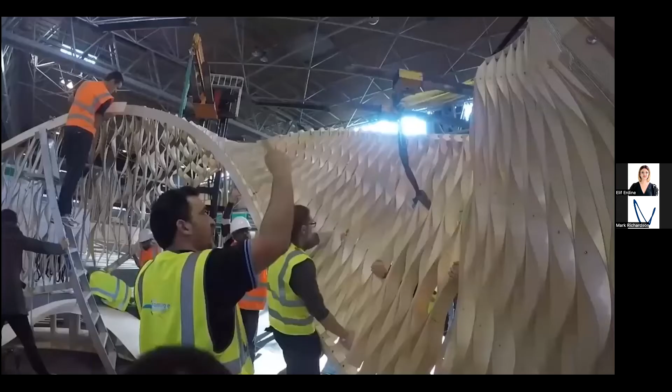For all of these systems, we work with various design methodologies, which can be computational-based, simulation-based, or even software applications. Just to give a brief overview of the research on spatial structures undertaken in EmTech over the past 20 years, this video shows very quickly what we have been developing, experimenting with novel design processes, computational methodologies, and building systems.

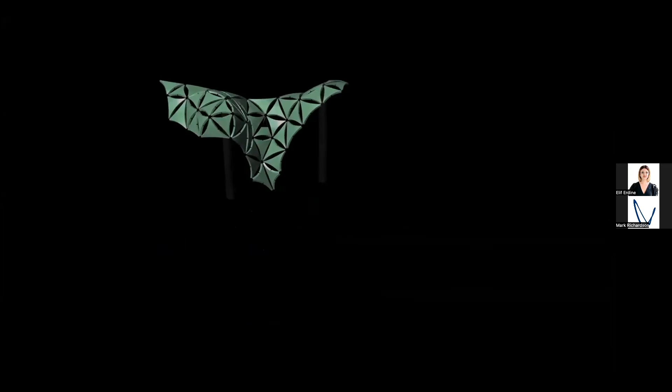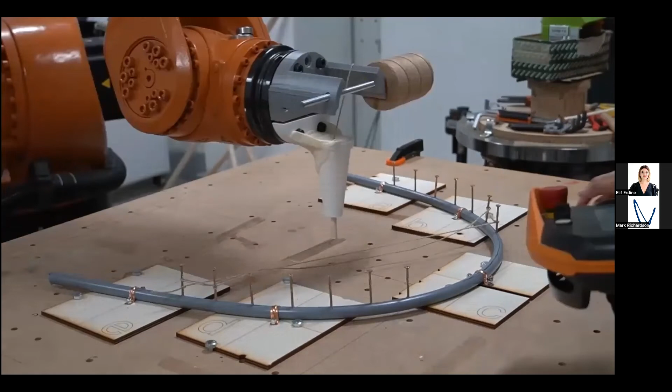I want to stress that all of our computational experiments are really calibrated from physical experimentation. We first look into material behavior on a component or regional scale, and then we're interested in quantifying these material behaviors to develop more complex computational systems.

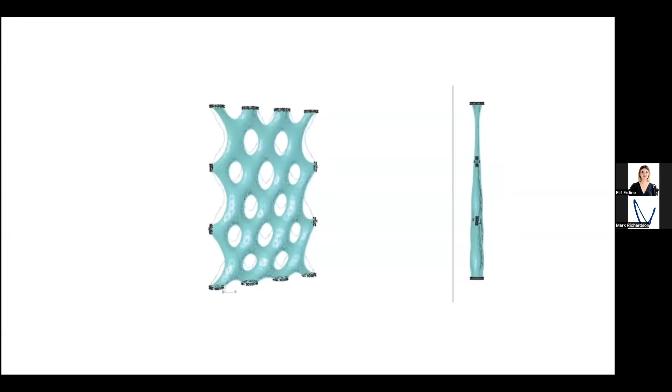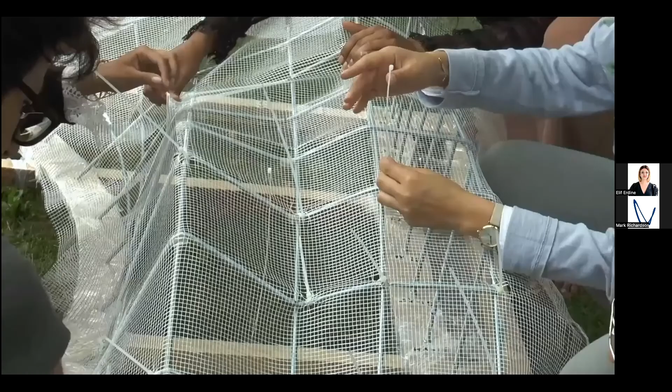We believe it is impossible to build your knowledge from only one project, so we try not to use more than one technique or methodology in one project. We like to approach research as a craft tradition, an atelier tradition. Rather than developing one big tool, we believe it's more intelligent to design smaller tools tailored for every individual project.

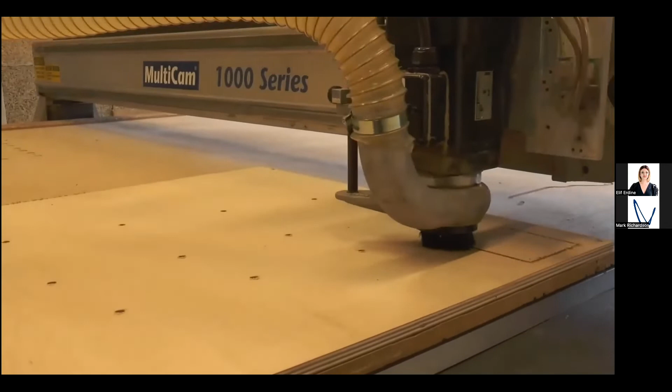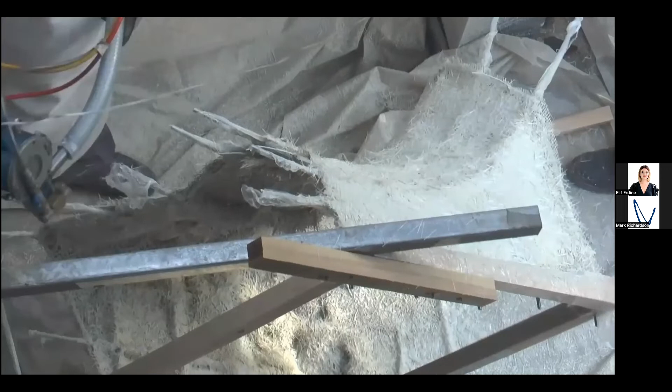You're seeing also some of the workshops that we have been conducting throughout the world, in Istanbul and London, as well as the research that we're undertaking in EmTech.

Our approach is very much inspired by nature, and I'm sure you've heard the phrase 'form follows function.' But what we're really talking about is not imitating the forms of nature, which has been done a lot in the past. We're really talking about designing using the processes of nature—that's the evolutionary process I'd like to talk about today.

Understanding evolutionary processes and principles: if we approach biological principles, biology, design, and computation as three different fields, we believe we can create a bridge between evolutionary principles and design through computational processes. This bridge can create a feedback loop where design and computation influence one another.

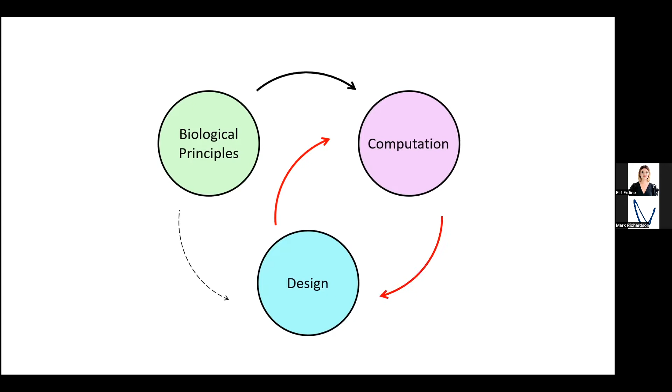As we might all be aware, architecture has a multifaceted nature across different scales, and the majority of problems we deal with in architecture involve multiple different objectives. That's why evolutionary computation, and in general learning from nature, is very relevant—nature teaches us about complex systems that emerge from the local interaction of parts.

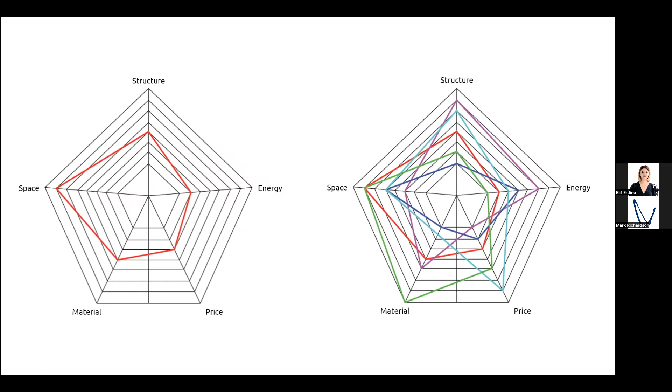This understanding, this way of approaching architecture as a field dealing with multiple conflicting objectives, really necessitates us to question the architect's role. When, as architects, we use these methods—learning from nature, understanding evolutionary principles—as a method of solving a problem, our role essentially changes from coming up with a single solution to coming up with a series of questions and architectural problems.

That's how we approach our design problems across various scales in EmTech. For us, it's really about designing the architectural question or the problematic, not coming up with a singular solution. So if we set this approach on one side, I want to give you a brief summary before I jump into the project.

I want to summarize the kinds of constructions, spatial structures that we've been building in EmTech for the past two decades. The emphasis for today will be timber structures. At the AA, in EmTech in particular, we're interested in the culture of making.

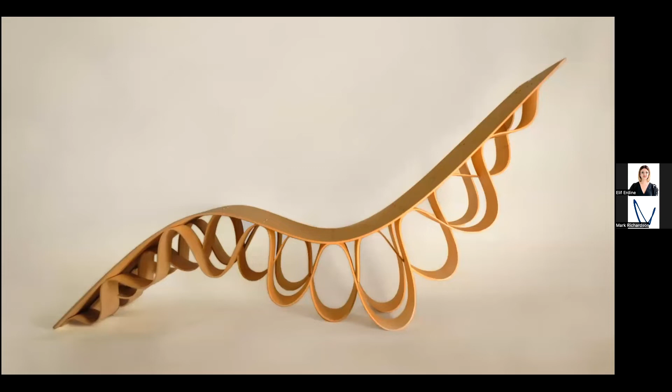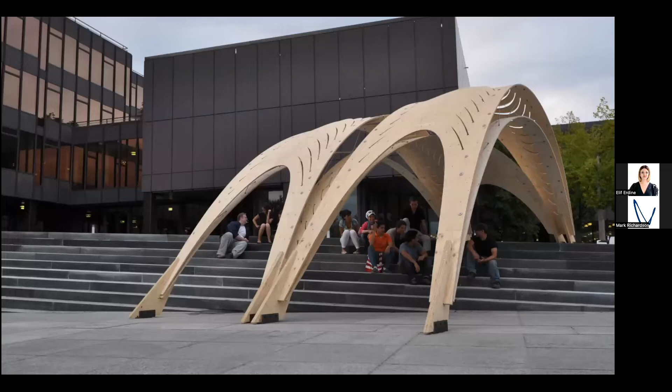We really enjoy making, and we collaborate with engineers as well—we really believe in learning by doing. Over the past two decades, we've built several structures made with timber with different functionalities, created with lightweight timber panels or sheets. Through different techniques, such as different types of formwork or ways of inducing curvature in different directions, we have designed these self-standing structures. In most of these, we collaborated with Buro Happold Engineering; this one was a collaboration with ETH.

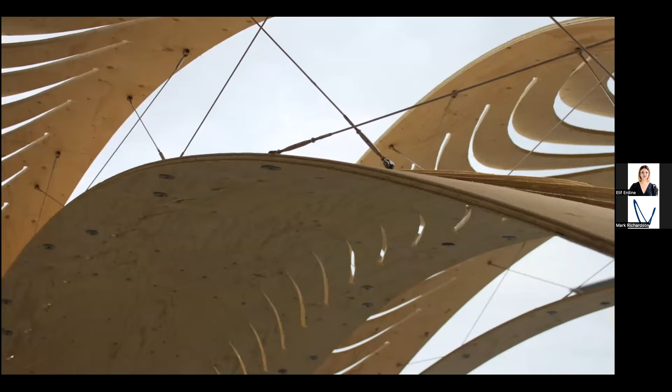Another example is a study based on creating a doubly curved self-standing structure, based on the different material behavior of timber in different directions. Some examples of that—this was a collaboration with Arup.

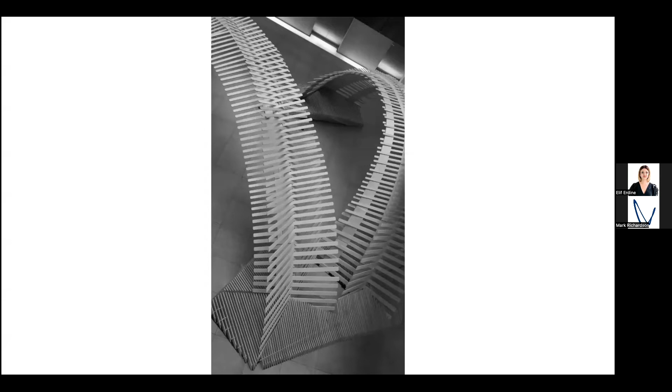As I said earlier, in each of these structures we've been exploring a specific technique geared towards inducing curvature, or joinery, or a combination of both. These projects are very much student-led—they begin with tabletop models, as you see here.

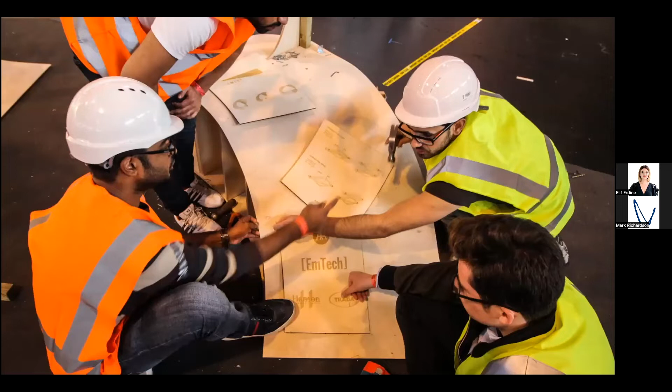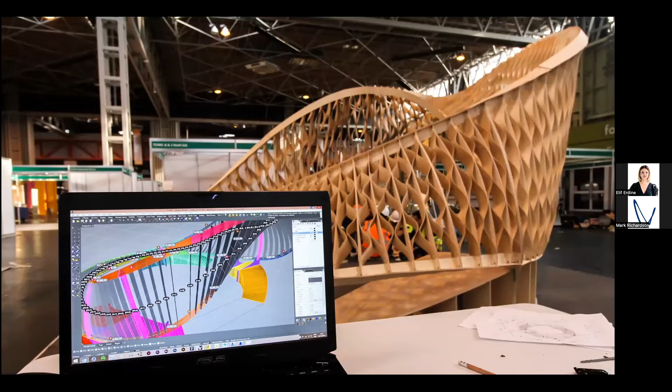So the structure I'd like to discuss today was a collaboration between EmTech and Hassell Studio. For those who might not be aware, Hassell Studio is a very large architectural office based in Australia, with offices also in London, New York, and Shanghai. We were approached by Hassell for this collaboration. This pavilion, the Remerge Pavilion, we built last year, almost exactly a year ago. It was open to the public on Bedford Square for a month. Our structural consultants were Buro Happold Engineering, and our life cycle assessment consultants were One Click LCA.

This is Bedford Square, where the AA is located. In terms of timing it was quite nice, because this was right after we moved back to our studios—after lockdown we were online for a year or so. So when Hassell approached us, it was right around the time we were back at the AA. It was a really nice way to come back to our buildings and restart that making culture again.

So I will first describe the design principles for the pavilion. Hassell Studio asked us to keep the carbon footprint of the project to an absolute minimum, and so they asked us to use only reclaimed wood for this pavilion. Of course, using reclaimed wood panels or planks requires the system to be modular.

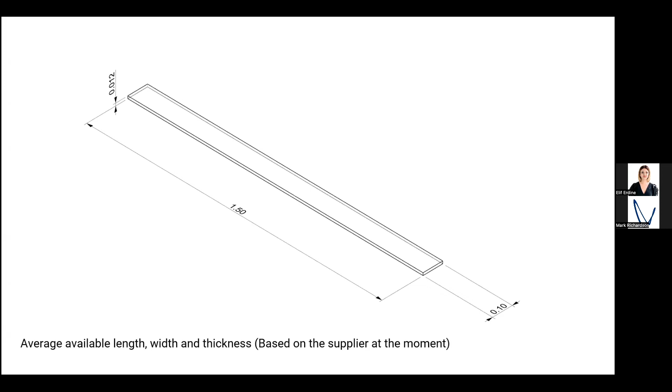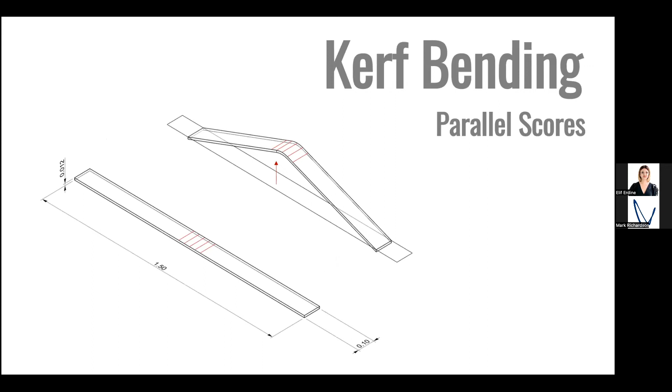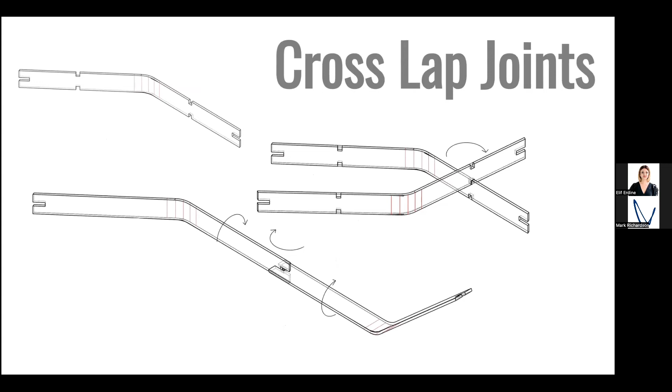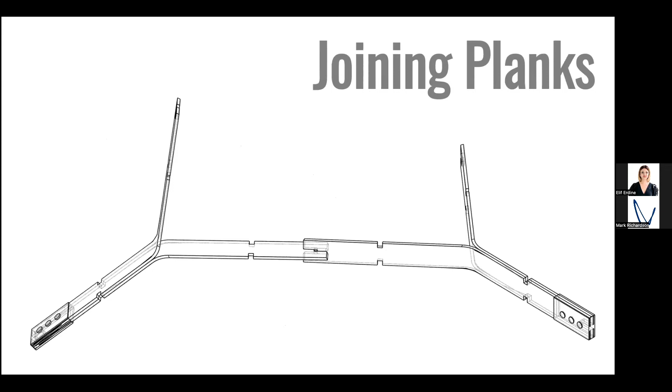So we started thinking about how we could create as lightweight a structure as possible with timber planks. Initially we thought about kerf bending, introducing scores into the timber planks—these can be parallel or radial scores. We were also careful about the joinery system; we wanted to minimize secondary materials in the joinery system. That's why we started exploring cross lap joints and how we could join these planks to create a regional scale aggregation.

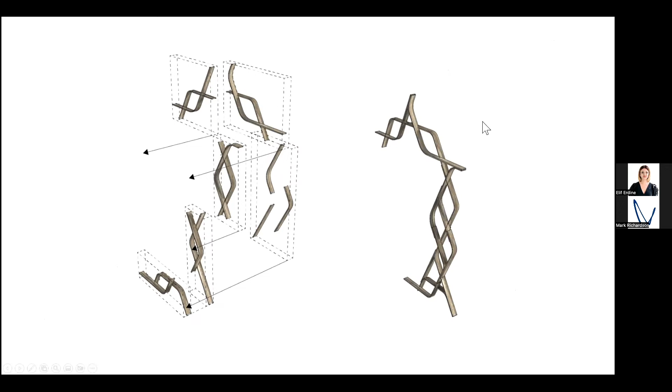This shows the system principles. We have these timber planks, which are scored and also steam bent—a combination of two techniques, creating 100-degree angles within one plank, then joining these planks to create this rib system. This rib system is then rotated and aggregated to create a self-standing structure.

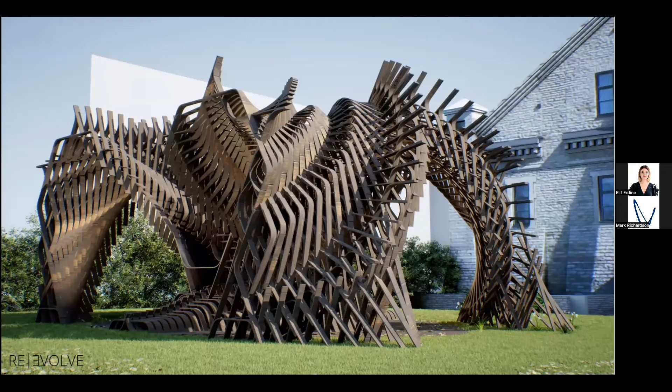So this was the initial conceptual design idea that we had. This design we also submitted for the Tallinn Architecture Biennale last year, and we were a finalist in that competition at the same time as we were developing the pavilion itself.

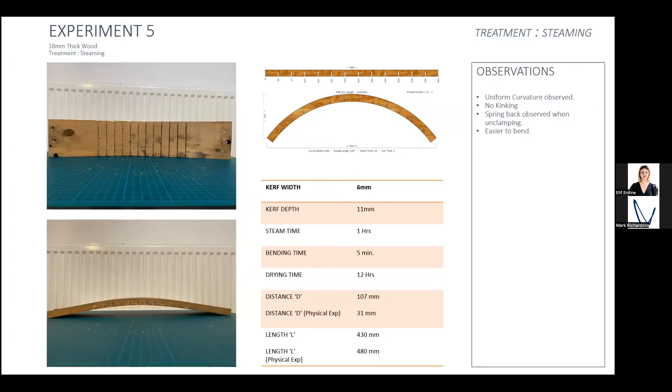During the scoring process, our students did a lot of physical experiments with the material we found—how much it can be bent, how much distance between each score, how deep the scores should be so the material doesn't break, as well as recording the production time of each experiment to estimate how long the final production phase would take, and of course recording the springback values. It was quite an iterative process, during the summer of 2021, and of course documenting and recording all of these experiments.

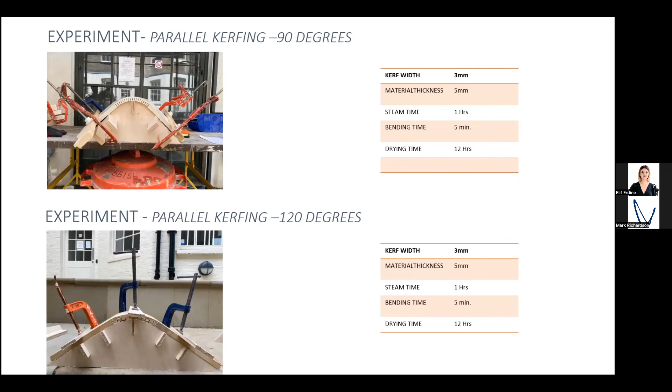As I mentioned earlier, using life cycle assessment was quite important in this phase. Using LCA as a design driver in the computational workflow basically allowed us to consider not only the material itself, but also the carbon emissions associated with its origins and transportation to Bedford Square. That accounts for the A1 to A5 stages—the material itself, transportation, and the construction phase.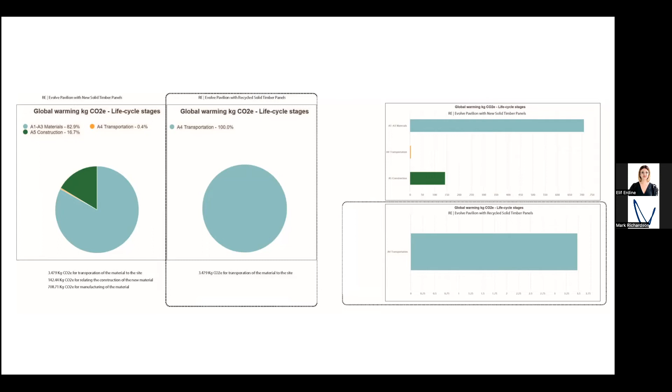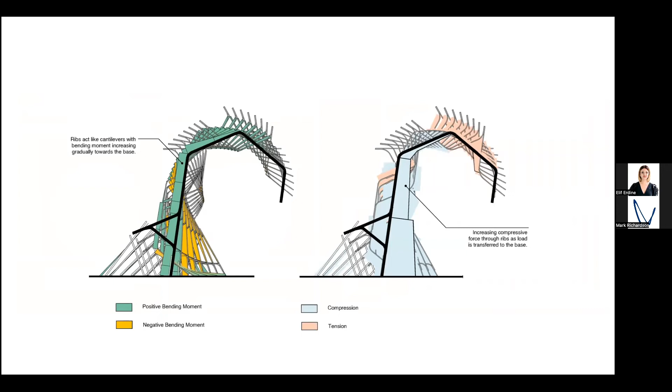Initial analysis of most types of plywood used for exterior construction versus, let's say, solid wood planks shows that plywood's carbon emissions are significantly higher in preparation than solid wood planks. So that solidifies the fact that using solid wood planks is beneficial. At the same time, the same effect of reducing carbon emissions occurs when we compare newly produced solid wood versus reclaimed wood planks. So we got this initial understanding and data from LCA, and obviously initial finite element analyses of the structure were also quantified.

All of this data—the physical experimentation, the life cycle assessment, and the structural analyses—was integrated into a multi-objective optimization workflow. In this case we used Wallacei, an evolutionary solver for Rhino Grasshopper 3D, developed by EmTech PhD researchers.

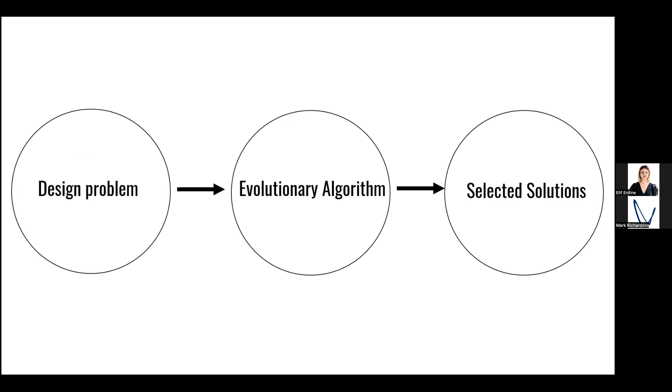In this collaboration between architecture and computation, through the employment of this method, there are three important steps: the design problem as the initial step, the evolutionary algorithm, and the selected solutions. The computer does the evolutionary algorithm part. So again, as architects we need to design the problem itself, and we need to analyze the solutions and select the appropriate ones.

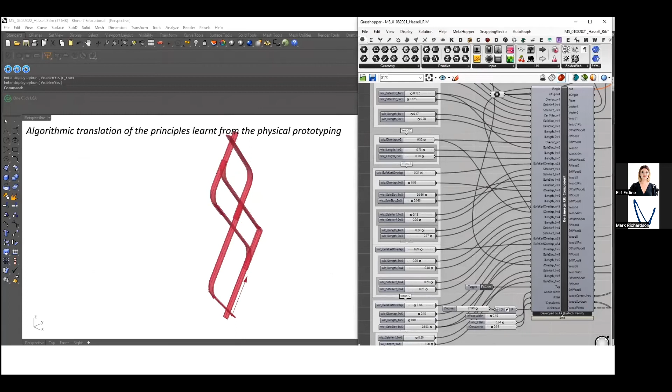This is a simulation that shows all of the information translated from the physical experiments into a computational system, where we're looking into variation within one, let's say, rib system.

In the next phase we created a morphology from all these ribs while simultaneously measuring the carbon footprint as well as the structural behavior. Sorry, one of these videos is not playing.

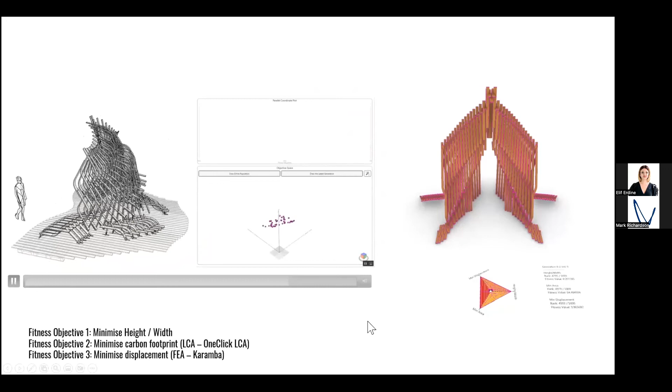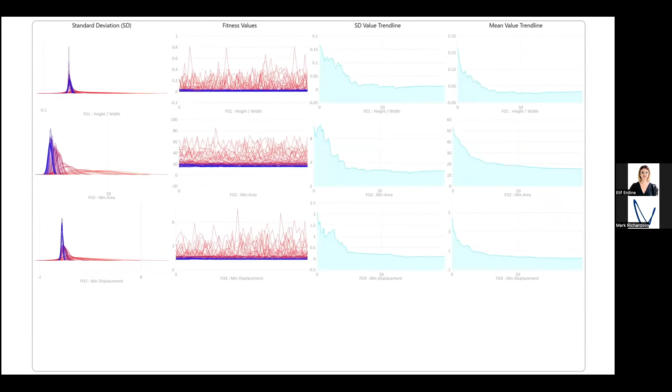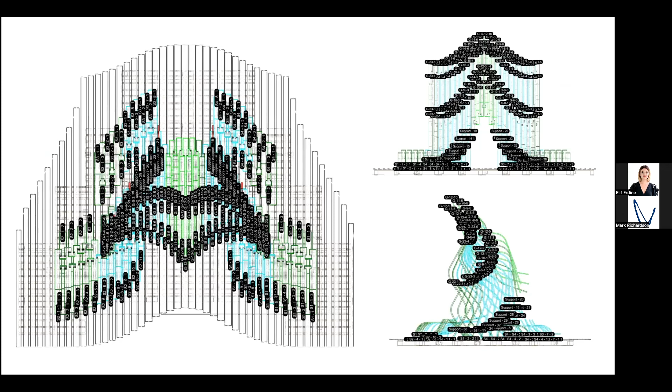So we can create thousands of solutions, but of course the important part is to analyze how they perform—everything is numerical, everything is data-based. From these solutions we selected one that was appropriate for further development within the time frame we had. And our computational model embeds all of the data in terms of construction and assembly sequences as well.

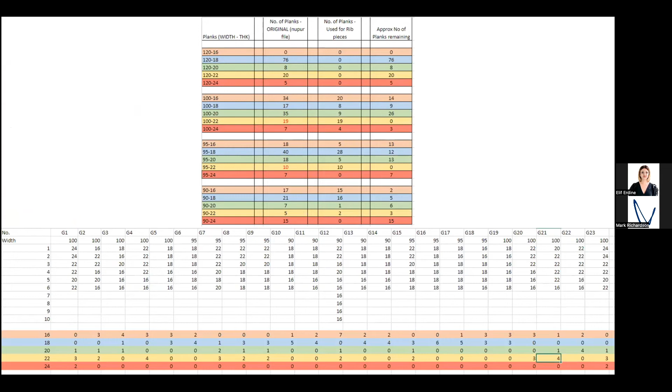These are some of the initial experiments, initial ribs coming up last summer, and joiner details. This was important for us because, as I said earlier, we didn't work with standardized sizes—the thickness and widths were varying a lot, and we had to embed that in the computational system, keeping track of what was broken, how we could replace it, and how we could update the computational system simultaneously.

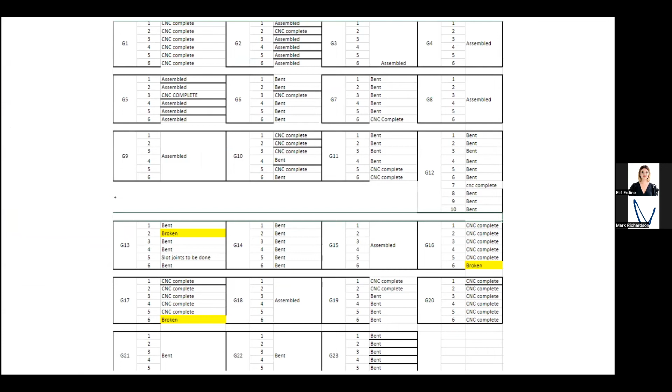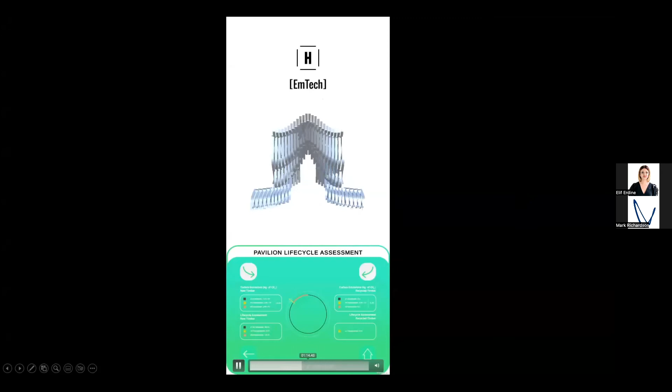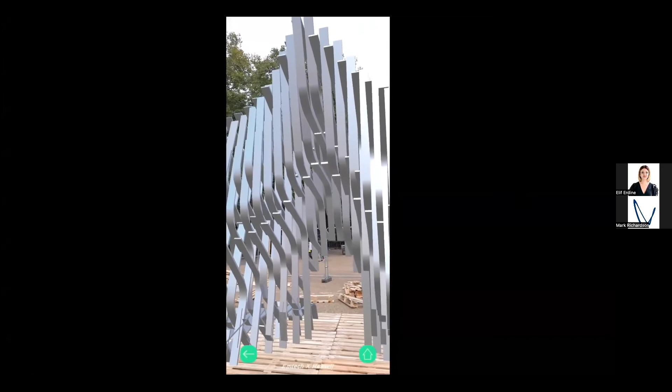At the same time, our students developed an AR app, and I'll jump into the relevant part here, where we could actually use the app to project the structure itself, which helped quite a lot with our assembly process.

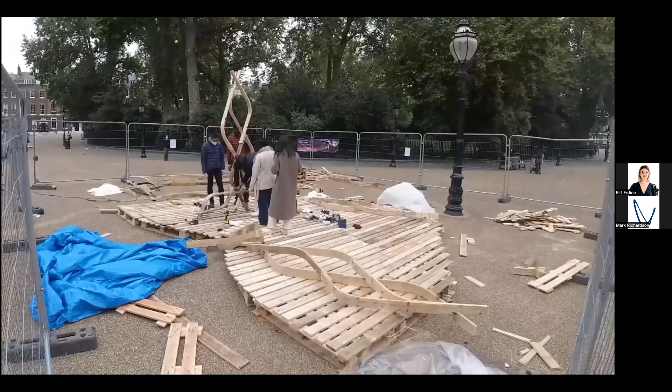This is showing the assembly process by our students. It took around 5 days.

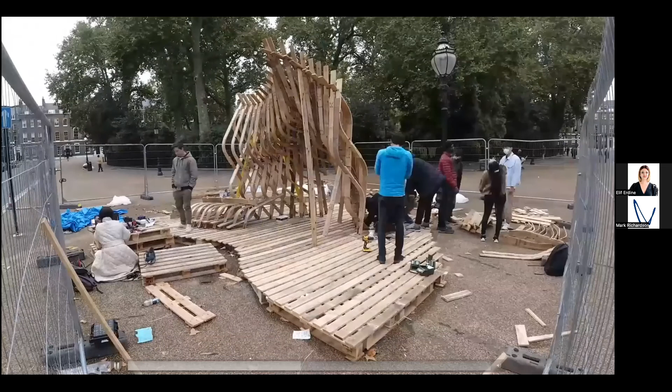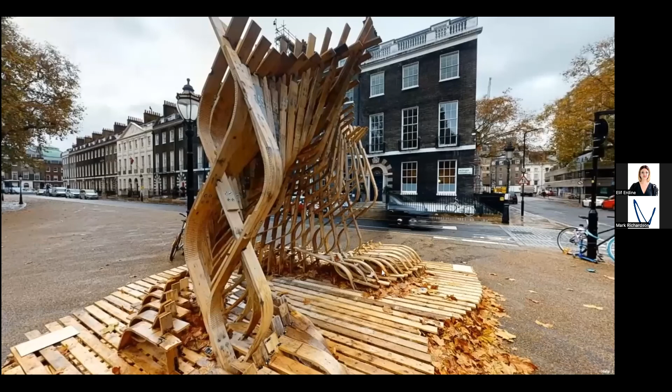And some final images. Here I just want to conclude by emphasizing that we like to capture our structures through 3D scanning. That's very important for us because afterwards we can overlay this 3D scan information with the final digital file to understand how the actual structure worked.

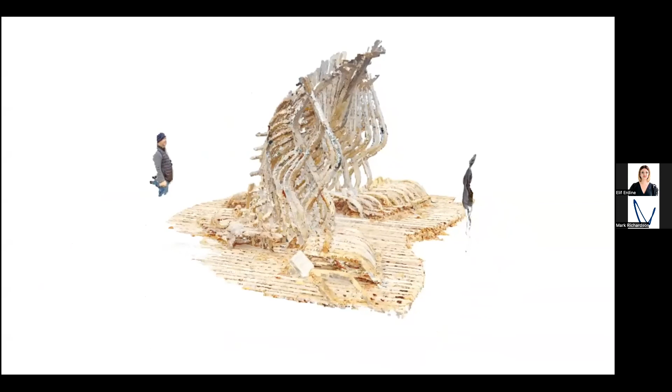You can see some of the deflections here in the cantilever area, for example. This is important for us, obviously, to write about when we are writing a research paper. We can use this information to draw conclusions and observations on how, in the next iteration, the structural system can be improved.

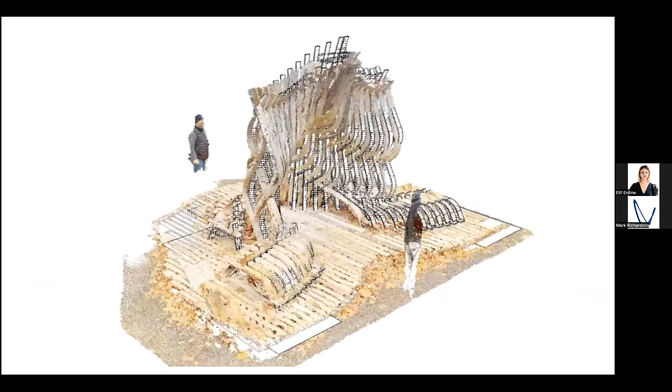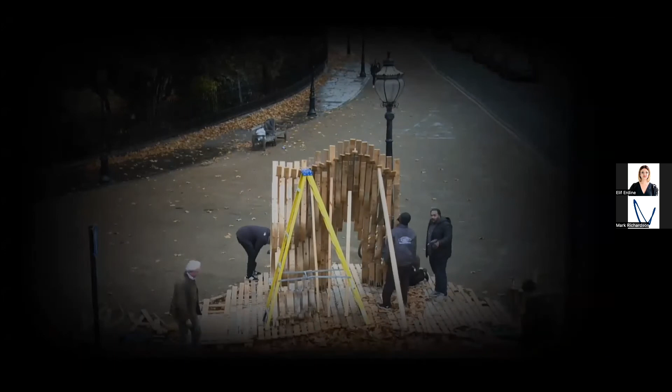This is showing the disassembly process. We gave most of the timber planks back to the recycling facilities. Some of them are kept in MTech Studio, some are in Hassell Studio, so they're still continuing their third life cycle.

For this collaboration with Hassell Studio, we won the Architizer A+ award in architecture and collaboration. I want to finish by emphasizing the importance of collaboration between academia and industry partners, structural consultancies, or software consultancies, because that creates an information loop, a feedback loop, which we believe leads to innovative workflows and research outputs.

Elif, thanks very much for taking us through your presentation, a really interesting overview of your work across a number of projects, particularly with respect to timber, which is handy for our end section of questions on sustainability and spatial structures. What are your personal views on sustainability and spatial structure projects? How can sustainability be improved within our community and its outputs?

Thank you for the question, Mark. As I tried to explain in the presentation, we're interested in approaching the question of sustainability from the early phases of design, and that's why quantification of data is very important. Now we have the computational tools to tackle this, like in the case where we used One Click LCA, which was quite helpful. This was the first time we used One Click LCA, and in general, included life cycle assessment into the design process.